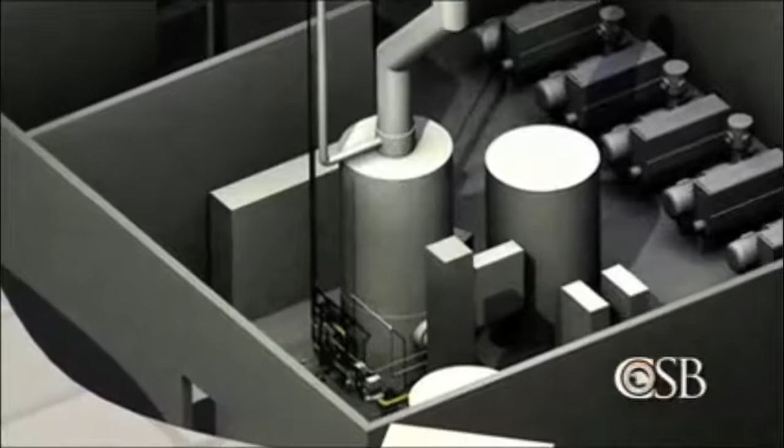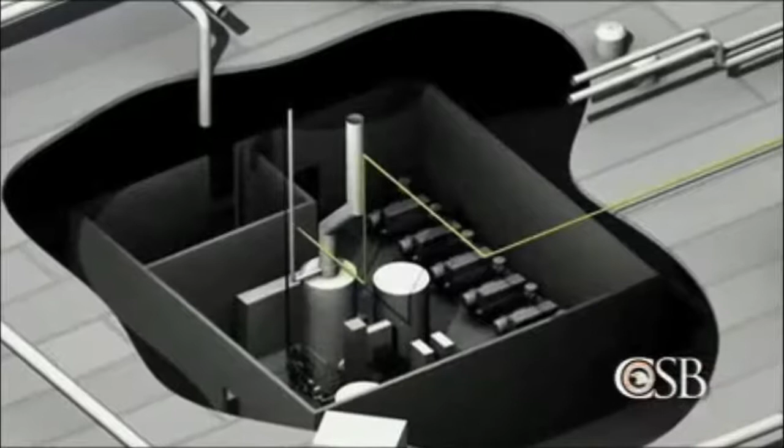Several days prior to the accident, a new steel gas pipe was connected to a natural gas supply pipe located on the roof of the plant. The newly installed gas pipe ran over 120 feet along the roof and then down into a utility room where the new water heater was located. The new gas piping was pressure tested with air to check for leaks, along with the existing supply pipe.

No leaks were found. ConAgra employees then used natural gas to purge or remove air from the supply pipe prior to use. Attaching a temporary hose to the supply pipe, ConAgra workers vented the flammable gas directly outdoors. However, they did not purge the air from the new steel pipe leading to the water heater. On the day of the accident, an ESA worker was attempting to remove air from this new piping prior to lighting the heater. But ConAgra did not always require piping to be purged outdoors.

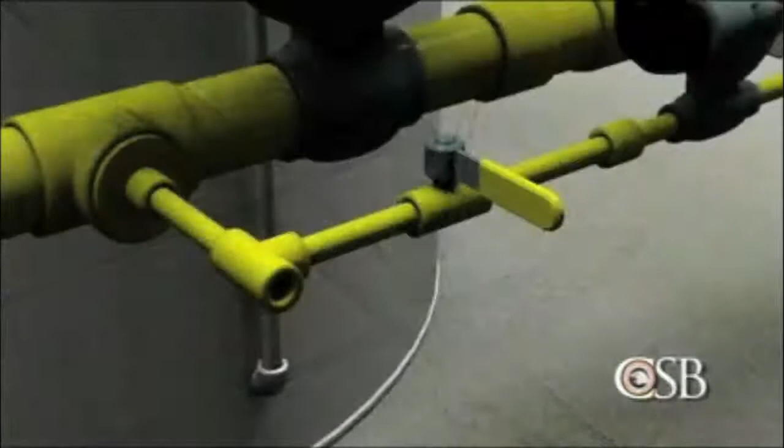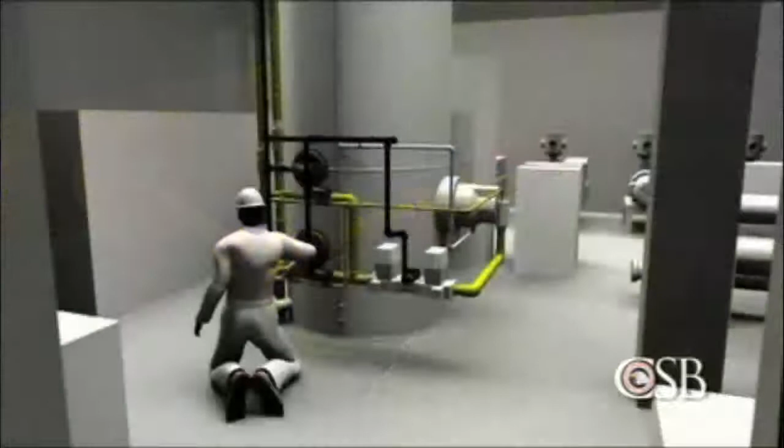The gas supply valve on the roof was opened. Then the ESA worker opened a valve near the water heater, allowing gases to escape through an opening in the pipe. However, he was unable to light the heater and evidently concluded that this was caused by air remaining in the pipe. So he continued venting the pipe intermittently into the utility room over 2.5 hours. But the air had left the pipe and invisible natural gas began entering the room.

No one used combustible gas detectors to monitor the atmosphere. Instead, workers used an unreliable practice. They trusted their sense of smell to warn them of the presence of natural gas. They were unaware that the gas had built up to a dangerous level inside the building. Shortly before 11:30 a.m., the natural gas found one of several potential ignition sources, perhaps an electrical device, and ignited,

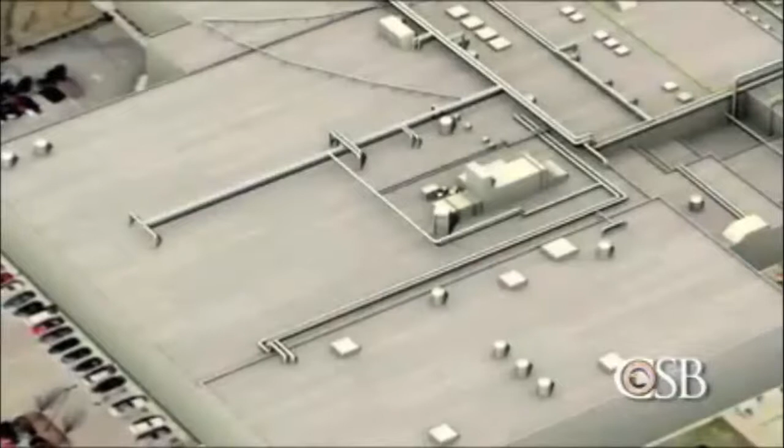causing a catastrophic explosion. The building construction included prefabricated concrete roofing slabs known as double T's, weighing about 12 tons each. Many of these double T's came crashing down to the floor more than 20 feet below, injuring and trapping workers.

Natural gas often has an odor added to it, a mercaptan, and this odor is put there so that people can recognize when natural gas is present. However, people don't realize that they can become desensitized to odor. The CSB also noted that new gas pipes and containers can remove the odorant from natural gas, an effect known as odor fade. One of the lessons we've learned from ConAgra in these similar

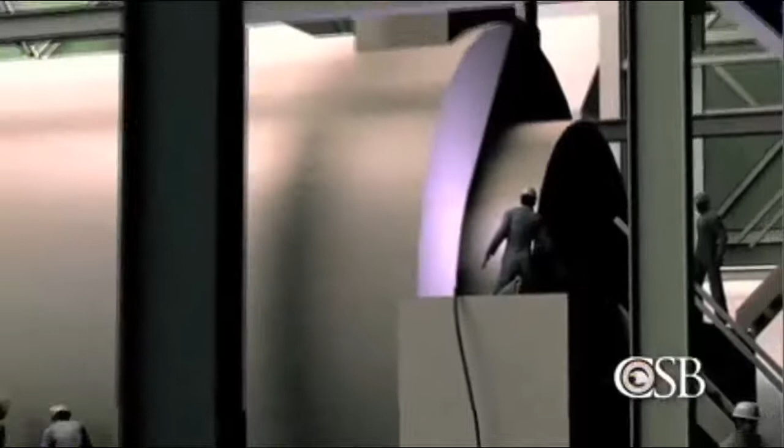are difficult to completely eliminate. In addition, metal debris expelled from piping can strike other objects, causing sparks that can ignite the gas. More than 150 workers were at the plant that day, including over 50 inside the power generation building. Only about 15 of the 50 were actually involved in conducting the gas flows. Beginning at 7:30 a.m., gas and debris were released from a number of open pipes just outside the power generation building. 15 gas flows took place that day over a 4-hour period.

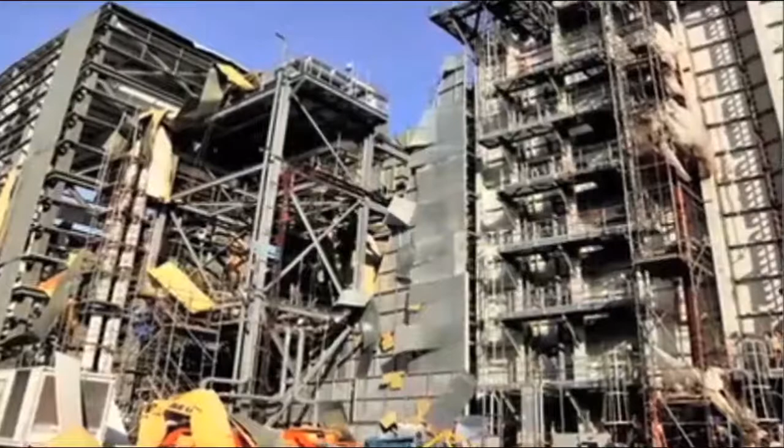Gas company records show that some 2 million standard cubic feet of natural gas were released to the atmosphere that morning, enough to fuel a typical American home every day for more than 25 years. Around 11:15 a.m., gas was blown through an open pipe into a congested outdoor area next to the power generation building. The natural gas accumulated to dangerous levels, contacted an ignition source, and exploded. Six people were killed, and at least 50 were injured. The CSB believes that the use of flammable natural gas in gas.

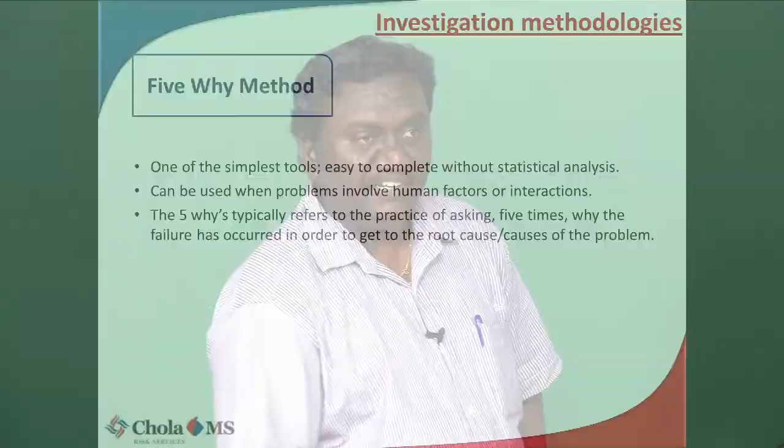Okay, fine. Are you clear with this? Let's do analysis using 5Ms. Start with materials. What went wrong with materials? What is the gas used? So natural gas. What is the property of the natural gas? What was the activity? Why natural gas was vented?

The activity was called purging. To clean the pipeline or clean the equipment, because it's in construction. From the construction they are just going for pre-commissioning or commissioning activities. So during the construction there may be debris which can be present in the pipeline or the equipment. Before they start the plant, that pipeline has to be cleaned. How to clean?

By pressurizing, using the compressed gas or pressurized gas, whatever the content inside can be let out. The idea behind it is cleaning the pipelines as well as the turbine blades in the second case. So what they have done is purging. Fine, it is for cleaning the pipelines. So the material they used is natural gas, right? Is there any option instead of natural gas?

Possibly compressed air, but with compressed air there may be some issues because it has some moisture. If the equipment has to be maintained free from moisture, the option of using compressed air can be ruled out, because generally in air you may find some amount of moisture, or otherwise you have to use dry air. That is one possibility. Is it possible, can you use nitrogen? Nitrogen is possible.

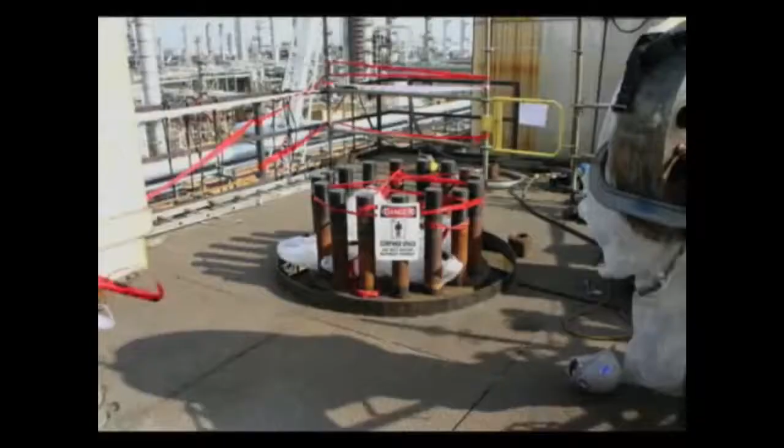Describe a funny feeling where they can take a deep breath and they still feel like they're suffocating. On November 5th, 2005, 2 workers died at Valero Energy Corporation refinery in Delaware City, Delaware. They had entered a reactor vessel, a confined space that was filled with nitrogen, an odorless, invisible gas. The accident occurred during a maintenance operation at the 5,000-acre facility, which processes 180,000 barrels of crude oil per day.

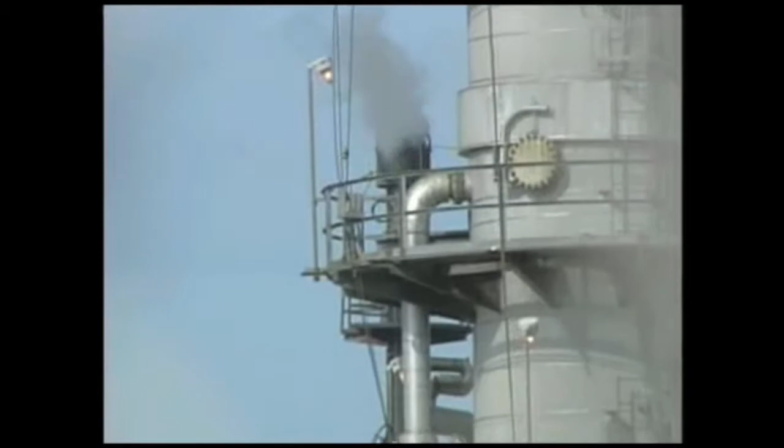The complex is one of Valero's 18 U.S. refineries and has 570 employees. The U.S. Chemical Safety Board investigated the accident and issued a case study with safety recommendations. This is not a new issue for the CSB. In fact, the board conducted an earlier investigation into the hazards of nitrogen asphyxiation and issued a safety bulletin in 2003. It identified 85 nitrogen asphyxiation incidents that occurred between 1992 and 2002, killing 80 people and injuring 50.

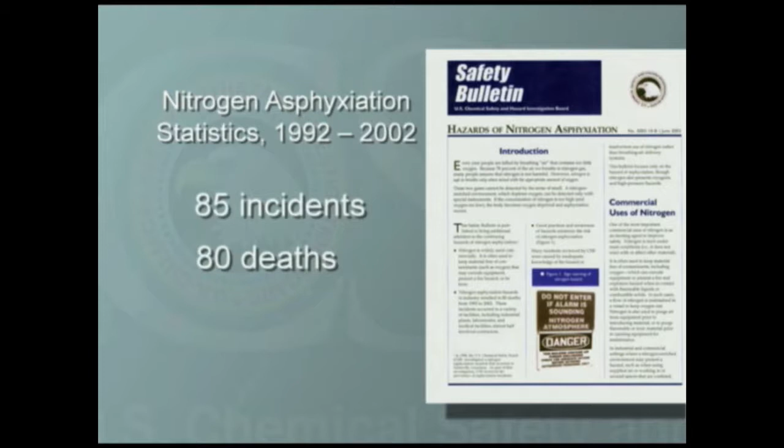That study and incidents since its publication in 2003 show that lives continue to be lost because workers are not being made aware of the dangers of oxygen deprivation. Oxygen comprises 21% of the air we breathe, and humans cannot survive for long when it drops below about 19%. In refineries and chemical plants, dangerous, low-oxygen environments are created when inert gases like nitrogen are used to remove oxygen from pipes and equipment. The risk of an oxygen-deprived atmosphere is that you will get trapped in that situation, get trapped and die.

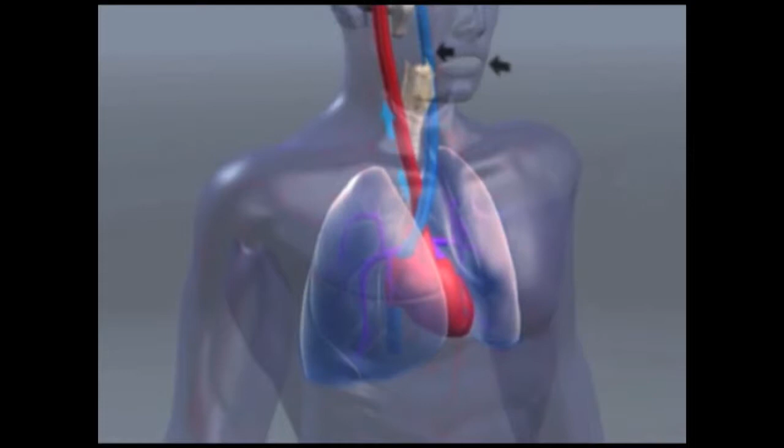Dr. Tee Guidotti is a physician and chairs the Department of Environmental and Occupational Health at George Washington University. He describes the effects of oxygen deprivation on workers. The moment a person first goes into an oxygen-deprived atmosphere, they are effectively in a vacuum. And when the oxygen-deprived atmosphere begins to enter the lungs, the oxygen in the blood, and so the brain, starts to fall. That affects the brain's judgment, it affects the breathing, it affects the ability to exert strength. They fall down, fall unconscious, or their judgment is so impaired that they can't find their way back out, and they die.

The CSB case study on the Valero accident underscores the importance of strict safeguards when working around low oxygen environments. Workers are in danger not only inside confined spaces, but also around openings where inert gases like nitrogen are flowing out. Here's what we believe happened the night of the accident.

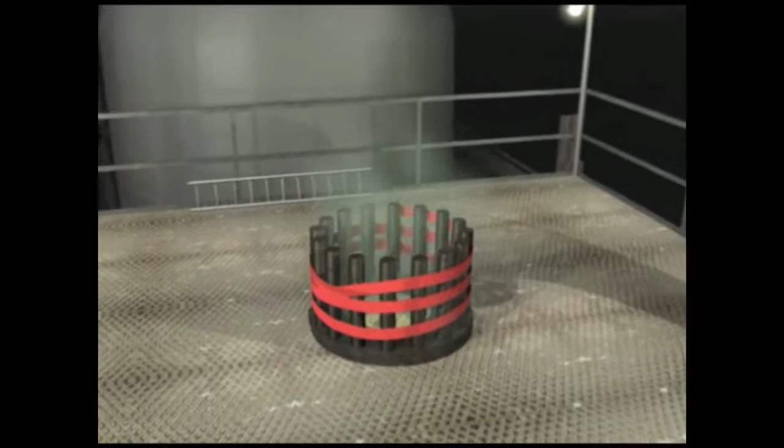Valero's hydrocracker reactor number R1 was shut down for maintenance. A large pipe elbow had been removed, creating an opening surrounded by large steel poles in the middle of the platform. Workers had wrapped red tape around the poles and covered the opening with plywood and plastic. Nitrogen flowed into the reactor and exited from the covered opening. Nitrogen is invisible, but it is colored light green here for illustration.

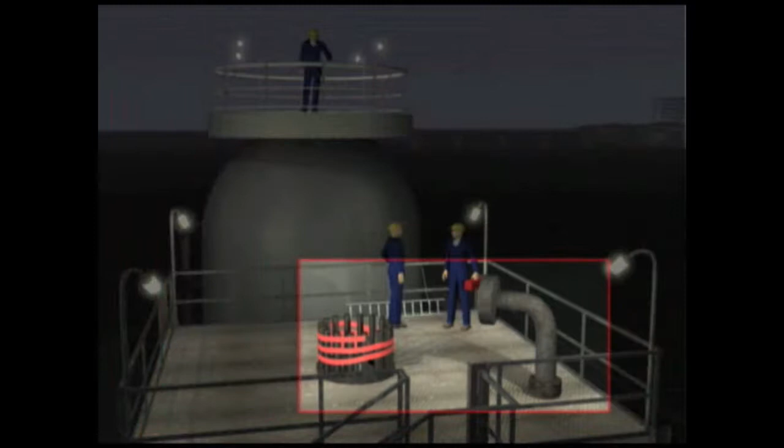Workers had attached a sign reading, "Danger, confined space, do not enter without permit." However, there were no specific warnings posted about the nitrogen hazard. A crew of Matrix contract workers had received a Valero-issued permit to reinstall the pipe elbow. The safe work permit did not warn the crew that the reactor was filled with nitrogen. In fact, the permit stated, quote, "Nitrogen purge NA, not applicable."

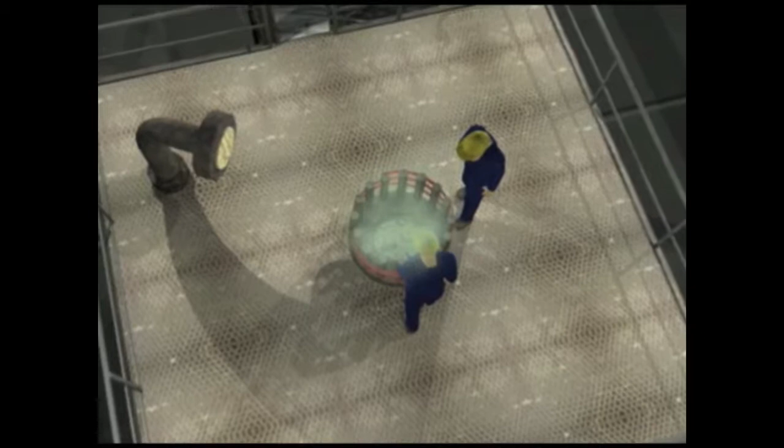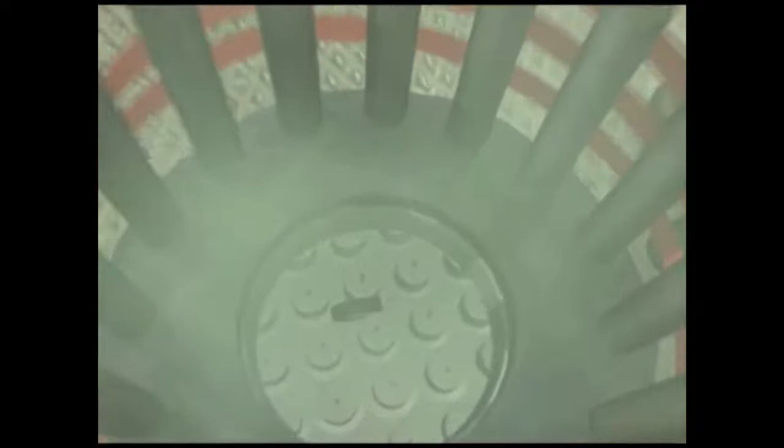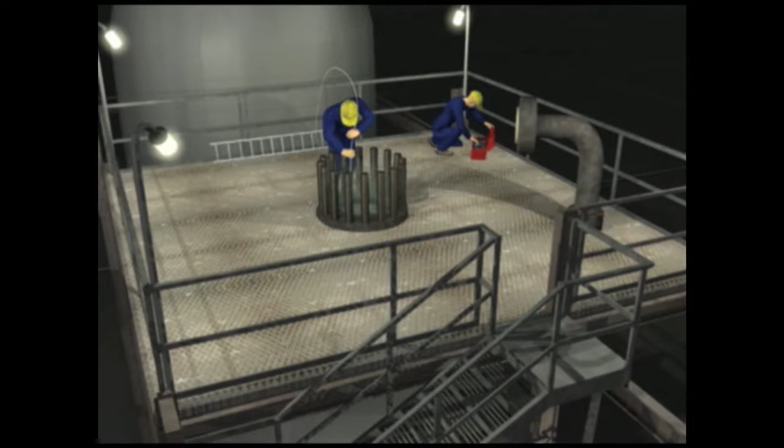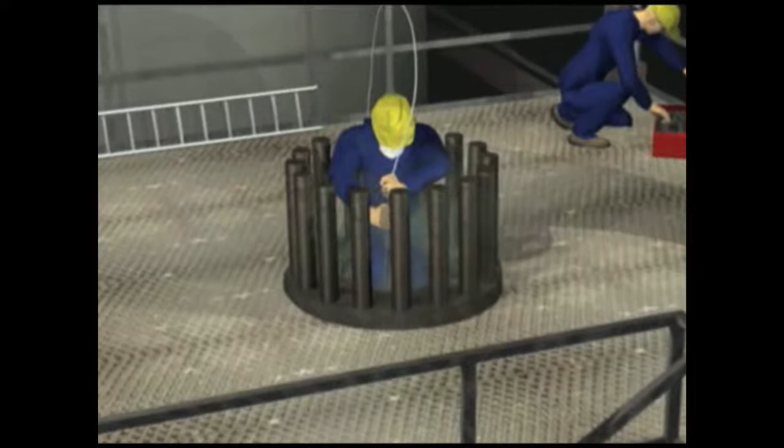Two contract workers removed the plywood cover and cleaned the ledge around the opening. At about that time, a third worker noticed a roll of duct tape lying 5 feet down inside the reactor. He then got closer by sitting on the ledge of the opening with his legs dangling inside, but he still could not remove the tape. Based on the evidence, the CSB developed two possible scenarios for what happened next.

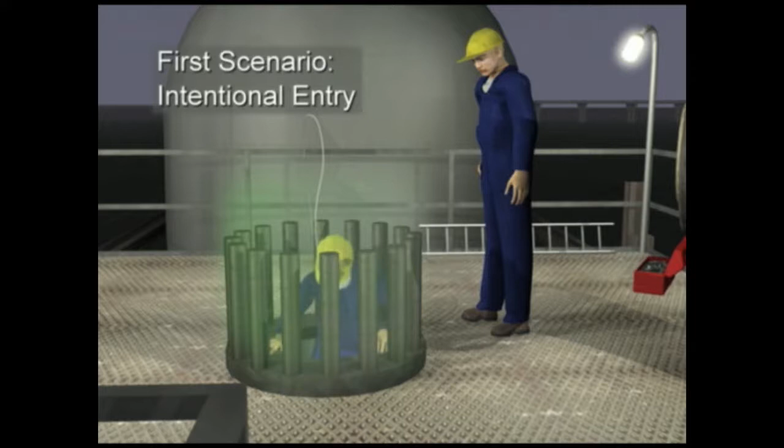In the first scenario, the worker lowered himself into the reactor to quickly grab the tape, relying on his foreman nearby to insert a ladder so he could climb back out. But after lowering himself into the reactor, he inhaled the nearly pure nitrogen inside. Deprived of oxygen, he quickly collapsed.

In the second scenario, the worker on the ledge leaned over the opening, trying to get closer to the tape. At that point, he either accidentally slipped into the reactor, or he breathed in the oxygen-deficient atmosphere just above the opening, lost consciousness, and slid in. What happened next added to the tragedy. An eyewitness saw the foreman and the contract administrator peering into the reactor. The stricken worker was lying unconscious inside.

The foreman quickly inserted the ladder into the reactor and climbed down to help his fellow worker. But without a breathing apparatus, he too collapsed from the lack of oxygen. The contract administrator declared an emergency on his radio. Valero operators then sounded the unit alarm. When company emergency responders arrived a short time later, they saw both victims lying motionless inside the reactor. A handheld meter inserted through the opening showed less than 1% oxygen, a lethal atmosphere.

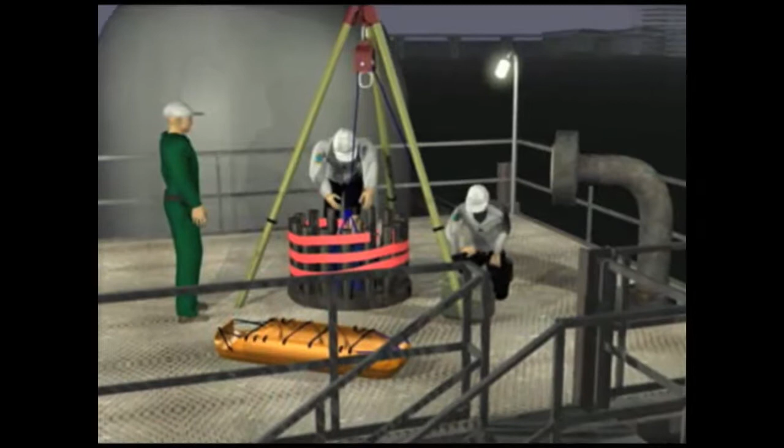Wearing supplied air breathing equipment, the responders entered the reactor. A rescue hoist was used to remove the workers. It was now almost 10 minutes since the first worker had collapsed. Attempts to revive the men were unsuccessful, and both were later pronounced dead in the hospital. The CSB believes that two workers died within a few minutes of entering the nitrogen-filled reactor. This tragic accident was avoidable. The CSB determined

Okay, well, for this particular accident, which will be the most suitable method to analyze? Which one will you select? We have seen different models, right? Different methods to investigate: fault tree, then 5M, then 5 Whys. Which will be the most convenient, suitable method to investigate this particular accident? If you are an investigator, which methodology will you adopt to investigate this accident?

You can apply any tools, agreed. Okay, if you are there as an investigator, which will be the most convenient method to investigate this particular accident? 5M? Okay. 5 Whys also? Good. Okay, let's try with both, not a problem. Okay, majority will go with 5M. We will start with 5M. Start with man. What went wrong with the man?

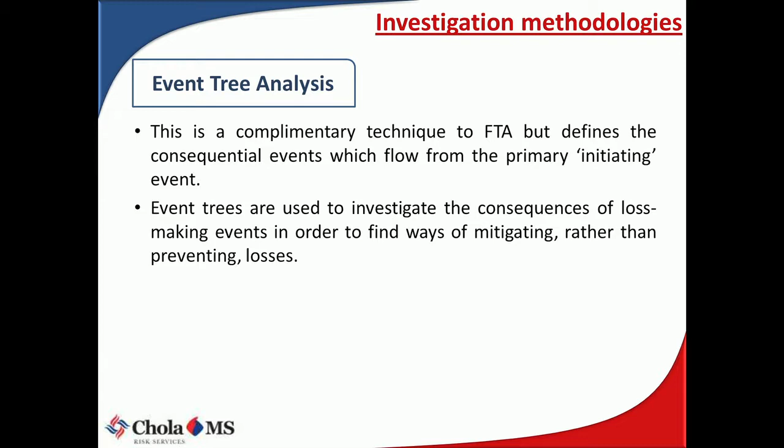Okay, this is event tree analysis. This is a complementary technique to FTA, but it defines the consequential events which flow from the primary initiating event. Fault tree analysis is a reverse thinking technique, in the sense that from the event, or from the fifth domino, we go back, whereas event tree is forward thinking. If there is a valve failure, assume that there is a near miss. In this case it was a near miss, but if you are keen on investigating a near miss, you can understand to what extent this near miss can result in, and you can establish that using an event tree.

So, event trees are used to investigate the consequence of loss-making events in order to find ways of mitigating rather than preventing losses. It is again a proactive, forward thinking method. You can always use an event tree to investigate your near misses. So, as we say with Frank Bird or Heinrich, for every 300 near misses there would be 29 minor incidents and one major. This is Heinrich.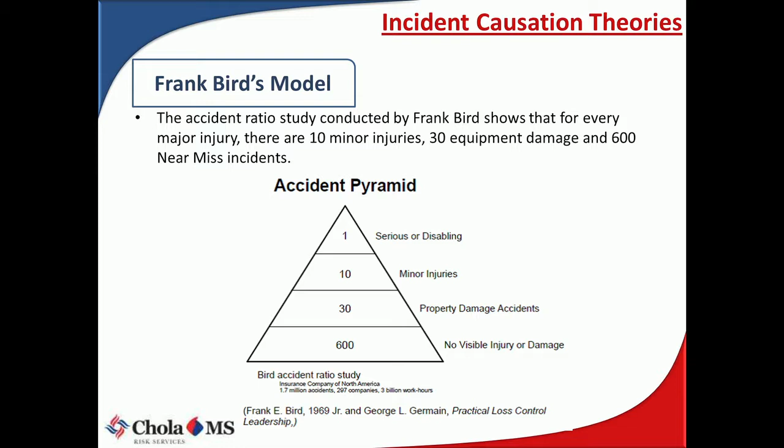When you talk about Frank Bird, it is 600, then how much? 600, 30, 10, then 1. So, 600 are near misses. Using the event tree, you can trace the path and apply some control measures so that the major, serious or disabling injury or incident can be prevented. So, event tree is generally a proactive method which can also be useful for an investigator.

How to go about the event tree? Identify the primary event of concern, take a near miss. Identify the controls that are assigned to deal with the primary event, such as automatic safety systems, alarms and operator actions. What are the control measures which are supposed to be there? Just assume. Construct the event tree beginning with the initiating event and proceeding through failures of the safety functions. Establish the resulting accident sequences. Probably it will end up in an explosion or a fire or some sort of loss. So, identify the critical failures that need to be addressed, where you can impose some actions so that the final event can be prevented.

So, all these methodologies we use are mainly to identify the root causes or the basic causes. The purpose of identifying the basic causes is to look into them and suggest some control measures or recommendations. So, when you develop an effective recommendation, you need to be very specific. Do not give generalized recommendations. The most important final step is to come up with a set of well considered recommendations designed to prevent recurrence of similar accidents. Once you are knowledgeable about the work process involved and the overall situation in your organization, it should not be too difficult to come up with realistic recommendations.

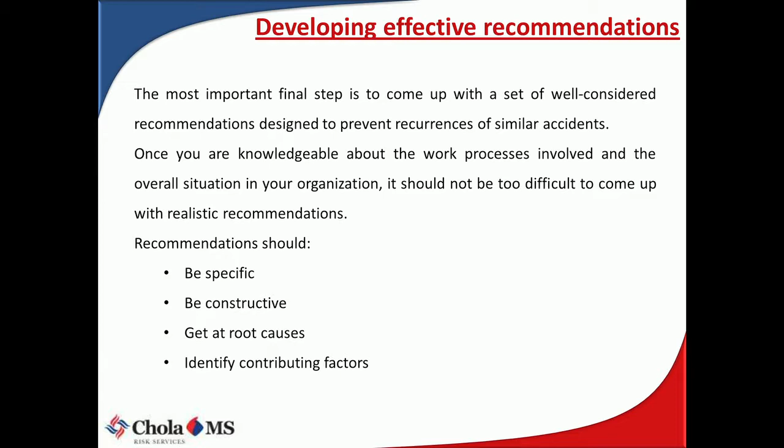Recommendations should be specific, constructive, get at the root cause, and identify contributing factors. Generally, recommendations should go as corrections, corrective actions and preventive actions. Corrections are something you do immediately to bring the situation back. Corrective actions are something you implement to avoid an accident. Preventive actions are ahead thinking, so that similar things wherever possible in your areas are prevented. So, your recommendations are generally given in these three categories: corrections, corrective actions and preventive actions.

So, that is it. Any questions? Any questions?

So in the last two days we started with the accident causation model, to summarize. We started with the domino effect using Heinrich's model, and looked into different theories: epidemiology theories, systematic theories, and multiple causation theories. Then finally we ended up with Frank Bird's model, which gave a different dimension from Heinrich, in the sense that for the fifth domino, instead of injury, he changed the word injury into loss. So in addition to that, lack of control, management control, was also demonstrated in Frank Bird's theory.

After that we started with different case studies using different methods we could use. So that is it. Any questions?

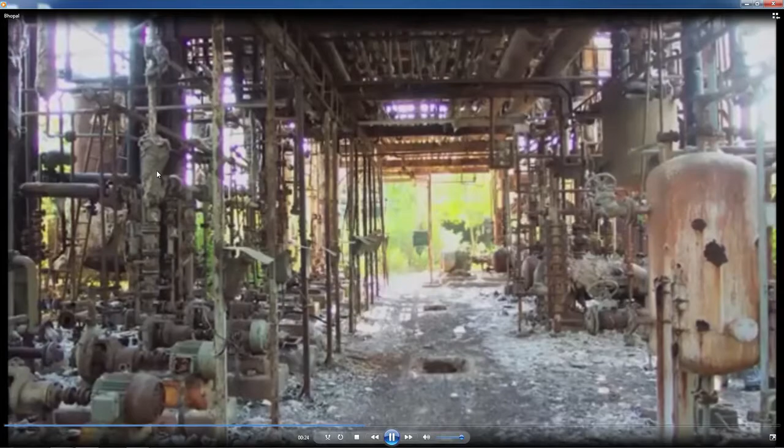The accident which I am going to show is generally familiar - you people are aware of the Bhopal gas tragedy, one of the worst disasters in the history of industrialization, which happened in 1984.

Okay, you've seen the results of that. So here is a schematic diagram of what went wrong. There were three tanks, the horizontal tanks, numbered E610, E611, and E619, where the methyl isocyanate was stored. The case is that accidentally water entered tank number 610, which at the time of the accident had 40 tons of methyl isocyanate stored inside. Because of the water entry, there was a rapid reaction and gas was released, which resulted in the devastation.

Okay, yesterday we saw two theories, right? The first one we saw is the model of Heinrich. The second one, developed by Frank Bird in 1969. Using that model, for each domino we will identify the situations.

What is the fifth one in Frank Bird? Try and find losses, total losses. When it's Heinrich, he told that the fifth domino is injury, but in 1969 a new dimension was given - not only does an accident result in injury, it can be a loss, it can be property damage, material damage, downtime, or anything. So Frank Bird's theory remains, and the process safety movement got activated after Frank Bird's.

In addition to that, as a passive protection, there is a water curtain. What is the purpose of the water curtain? If the gas is released, it should not be dispersed. If there is water, what will happen? It can be contained. In addition, methyl isocyanate with water may not be that toxic, it can be contained. That is the reason for the water curtain, which also was not high enough to contain all the gases released from the vent gas scrubber.

So all these reasons, all these complex factors led to an accident. Could you get my point? So in this way we need to come back, take the dominoes, starting from the fifth domino, which is the result, generally a loss. The loss we consider is a fatality, then it is an accident, release of methyl isocyanate to the atmosphere, then we try to identify facts and conditions, then basic causes, then it comes to lack of control. Could you correlate how to apply the same theory in a proactive sense to identify the root causes for the incident? Clear?

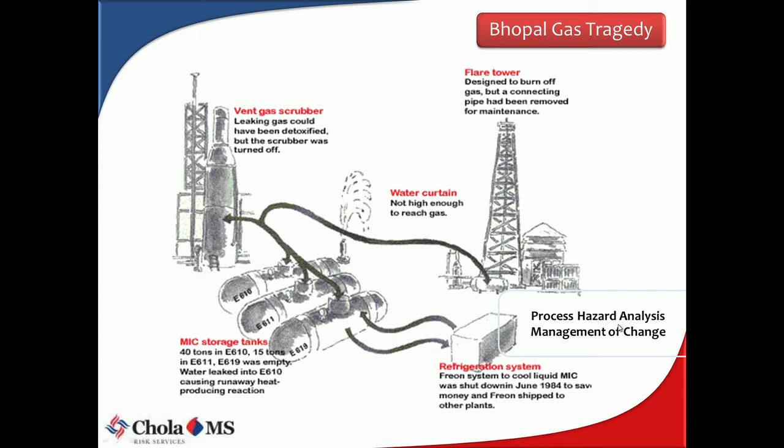Okay. Refrigeration system was not working. What is the PSM element missing here? There was no process hazard analysis and management of change, correct? There was no work permit system or training, no process hazard analysis, because the vent gas scrubber was not in line.

But what will be the effect? Nobody has studied, nobody has critically examined to understand the risk. There was no operating procedure. If there is no scrubber in line, there should not be operation, so that is not listed here. Then there is no flare, the pipe connected with the flare was disconnected, mechanical integrity was not ensured, correct? So flare is basically to burn the chemical.

Flare is something like a chimney. So when the gas is let out, it will basically be burnt out. The toxic gas which goes through the flare will be burnt out and only smoke or whatever will go out, meaning the toxic effects will be suppressed there. In the oil and gas industry also there is a flare — excess oil or gas which will not be let out raw is burnt, and only the smoke goes out. That is the purpose of flare. So even with flare, it is designed to burn off excess gas, that is the purpose of flare.

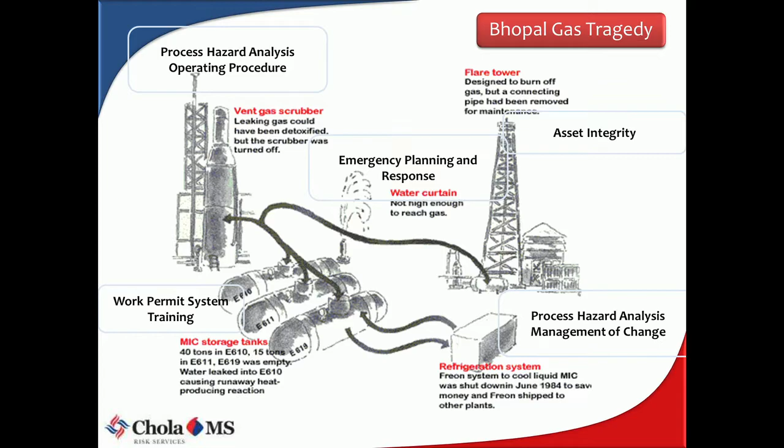Emergency planning and response is part of the curtain which is also not active or not in line. So all these different factors result in a major disaster. As we said yesterday, for every accident there won't be a single cause, it is multiple causes which are generally interactive, leading to an accident.

This is one of the techniques used for investigating an accident, generally called fault tree analysis. You would have seen it applied in different places. Here we take fault tree analysis for investigating an accident.

A structured team analysis of the possible underlying causes of a known equipment failure. Take an equipment failure, it is a reverse thinking technique. We start with the end result or end event, and from there we try to develop a tree, going back until we reach the basic cause, meaning where you cannot further develop the tree, we stop there. So all the unconcluded basic causes can be the result of an incident. We try to correlate or set points so that we can identify all the root causes in it.

Why is root cause analysis of failure needed? For a better understanding of the root causes of a failure, and a better set of action plans to eliminate those root causes. When you bring down the root causes to the point where you cannot further develop them, we generally call these basic causes or root causes. For each root cause you find a solution, so that if the solutions are implemented, you can prevent an accident.

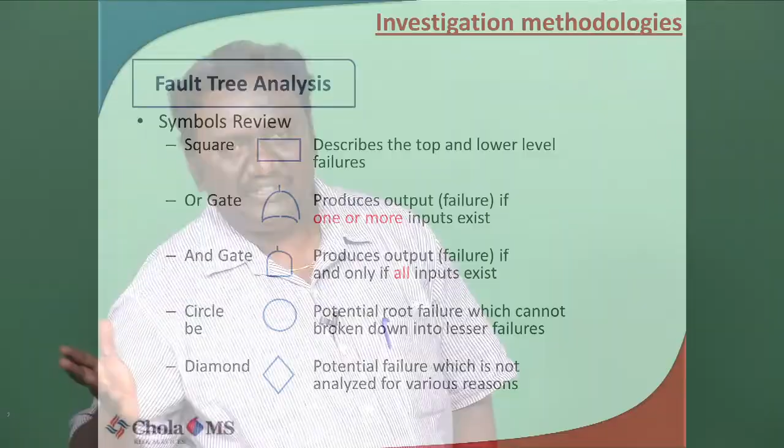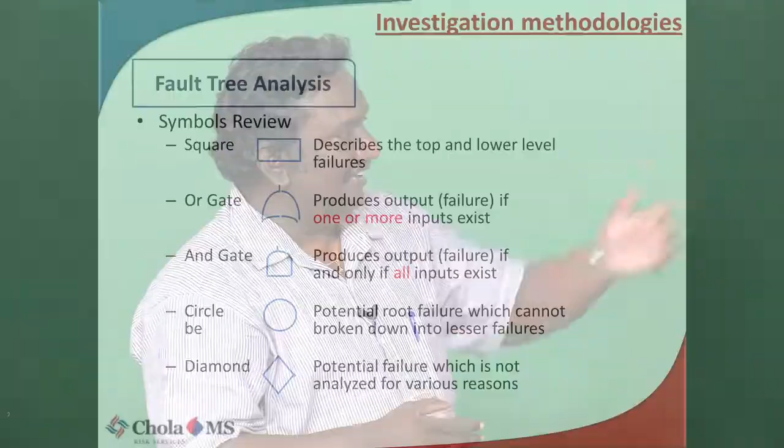These are the symbols generally used in the fault tree. The first symbol, a square, describes a failure or an event - it can be a top event or an intermediate event, shown as a square or small rectangle. An OR gate represents an either-or situation: there may be two or three causes, and not necessarily together, but either one will result in an event. An AND gate is a combination of two or three causes - when all of them happen together, it results in an event. A circle represents a basic event which cannot be further extended. A diamond represents a potential failure which is not analyzed for various reasons - this is the decision making gate.

So how do we go about fault tree analysis? First, identify a top failure. Take the example of the Bhopal gas tragedy which we discussed - what is the top event? Fatality, death of people - that will be the top event.

Then brainstorm basic contributors to the failure. From there you derive a tree using different gates - it can be an AND gate or OR gate. Whenever you choose an OR gate, the causes are independent, but when you take an AND gate, it is a combination of two or three causes. So you link contributors to the top failure, deriving a tree to determine which combination of contributors is needed to cause it. It is basically a brainstorming session with the people, using logic gates to develop trees until you derive the basic causes.

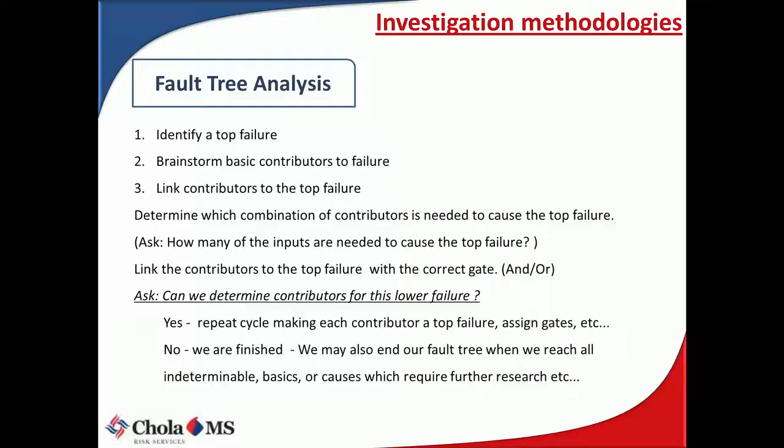Grinding can be done by a bench grinder or an angle grinder. What is the difference between them? There is a bench grinder, which is fixed to a table, where the wheel revolves while you hold the tool to grind it. So in a bench grinder, an operator controls the tool or workpiece - there are two things, the grinding wheel rotating, and the operator holding the job. Take for example a knife that you want to sharpen.

The operator holds the knife against the rotation of the wheel. Here the operator is controlling the job, not the wheel. The wheel just starts rotating when you switch it on, and stops when you switch off. The operator only controls the job. In the case of an angle grinder, the operator holds the grinding machine in his hand, and the job is generally fixed.

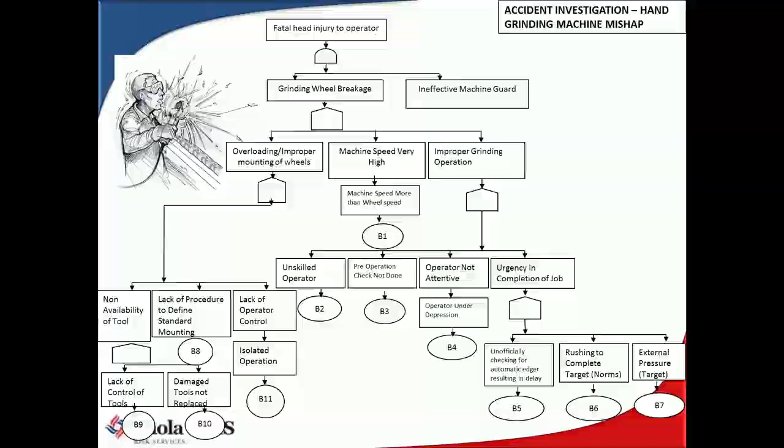If you have not chosen the right machine, say the wheel is designed for 6000 RPM whereas the machine was rotating at 9000 RPM, the wheel will also tend to rotate at 9000 RPM. So naturally the wheel can break at that point. So one cause can be machine speed very high. The second one is overloading, what we discussed, how the wheel was mounted in the machine. It can be over-tightened or it can be loose. For both reasons it can fail.

The next one is improper grinding operation. Probably the operator forcibly applied the wheel over the job. That is also a cause. If you apply more pressure, more force, the wheel tends to fail. So all these things are possible, but not together. Any one event can result in the successive event, the breakage of the wheel, correct? Could you follow me? Then we go to overloading or mounting of wheels.

What would be the reason? Non-availability of the tool. Probably he may not have the right spanner, so he has not tightened properly, or probably he has to use a torque wrench. What is the advantage of using a torque wrench? You know how much you are tightening. When you tighten with a spanner, you tighten by assumption, but when you apply a torque wrench, you know what torque you need to set for the particular bolts. So, non-availability of the tools.

Then lack of procedure to define the standard mounting, how to fix the wheel. So, probably there may be lack of procedures. Lack of operator control means that the operator was not supervised. So, any one of the reasons can lead to overloading of wheels. Then machine speed very high, machine speed more than the wheel speed. Possible? That is possible. So, that is a direct basic cause.

Further, the tree was not developed. Could you get it now? Because if the machine speed was more, nothing can be done. So, that is a direct root cause. So, that is concluded as B1, a basic cause. The round one is a basic cause. You cannot develop it further. That cause itself can result in an accident.

Then goes to improper grinding operation. Why? Unskilled operator. Whether the grinder has sufficient competency, skills, training, that would be the reason. Poor operations, pre-operation checks not done. Probably the wheel would have been broken before itself. He has to check the wheel before he mounts. Probably it was not done.

Operator not attentive, maybe due to some psychological issues or some problems. Urgency in completion of the job. Probably the operator was in some urgency, he wanted to complete the job well in time. So, all these things can lead to improper grinding operation. Okay. Here the lack of procedure also comes directly as a basic cause.

Then non-availability of the tool. The reason behind it is lack of control of tools or damaged tools. So, probably the operator may not have the right tools. The supervisor did not give the right tool to the operator, that may be one of the causes. Or the second one is damaged tool, so he has taken some tools as a jugaad for working on it. So, all these things can be causes. You understand how its cause is to be derived?

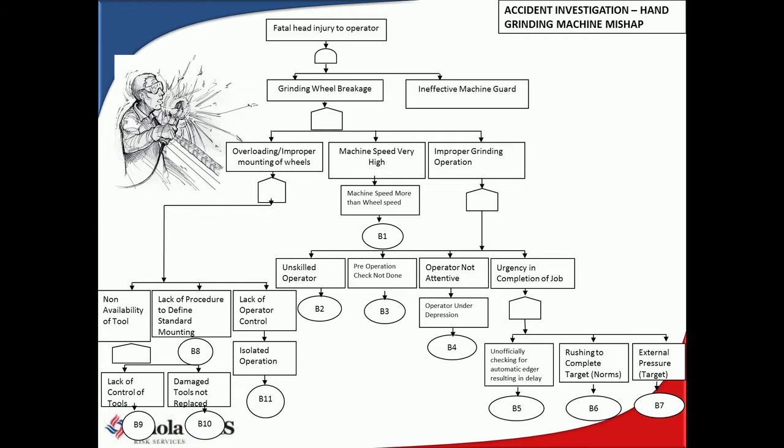Any questions? Okay. We establish a tree, we develop a tree till you reach the basic cause. So, whatever comes in the round B1, B2, B3, B4, B5, all these things are what? Basic cause or root cause. So, you need to focus on how to prevent these basic causes. For each basic cause, you need to provide suggestions or recommendations. If these recommendations are addressed or implemented, then these accidents can be prevented. You understand how to go about it?

There are different ways to perform an investigation, generally by checklist, by interrogating the witness, by taking a statement, by physically checking the working place, verifying the documents, you can conclude. Certain things, if you are not in a position to conclude, you can take some methodologies. One of the investigation methodologies can be fault tree. So, the way you have to proceed is this. Any doubts? Shall I move on?

This is the next method, 5M methods. Yesterday we discussed it. What are the 5Ms? Man, machine, material, method, management or mother nature. It is an environment factor you can also consider. The 5M methods comprise man, machine, material, method and management. These are 5 core areas in which factors of accidents and incidents may appear.

When you consider man, it refers to human elements inclusive of psychological, physiological, proficiency aspects, skill aspects as well as qualification for performing the task. Okay, personal factors. We all talk about basic causes. In basic causes there are 2 things, one is personal factor, the second one is job factor. Here with man we address the basic cause of personal factor. Then machine, job factor, refers to equipment such as machinery, computers, tools, instruments.

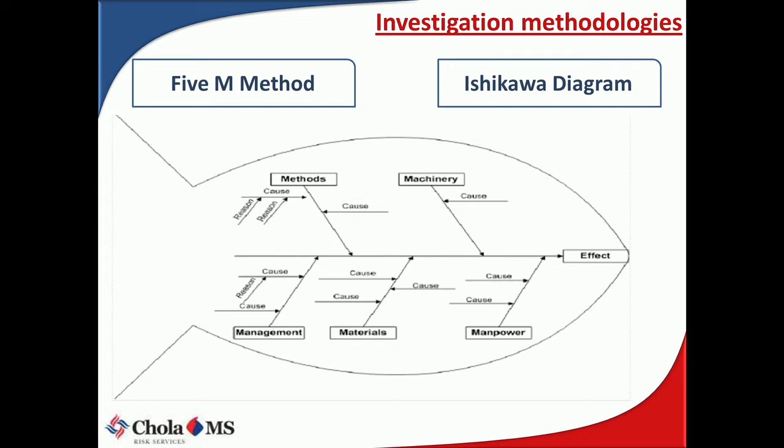Material refers to defective material or incompatible material properties. Methods refer to the rules, regulations, laws, standards or procedures that are supposed to be followed. Management refers to the supervisory capacity of management in terms of regulations, policy, attitudes towards safety. So, generally in the 5M methods, the Ishikawa diagram, we try to put questions and causes, identify them in relation to the 5Ms, and conclude the basic cause from that.

Okay. In industries or workshops, to transfer material from one place to other, generally there will be a crane. The crane will be moving in the rails which are at the top. There will be two rails, in between that there is a trolley fixed. So you are able to achieve long traverse, meaning the crane moves from one end of the building to the other end of the building, along the wall. In the sense, it moves on the rail.

Horizontally also you can move the trolley, because you may have equipment in different places, so it has to move horizontally as well as longitudinally. So there will be a hoist at the top, like a pulley block, which is used to hoist from top to bottom and bottom to top to pick up.

Here the crane movement is generally controlled by a pendant switch operated by the operator from the ground. EOT cranes can be operated in two ways: using the pendant switch, kept by the operator on the ground, or sometimes the operator sits at the top of the EOT crane. There will be a cabin and he can operate. Sorry. For small cranes, generally the operator uses the pendant switch to move.

An operator was shifting an empty tank from the welding area to the dispatching area by using the EOT crane. The EOT crane could not be stopped during its travel due to the failure of the pendant switch buttons. If you see the pendant switch, there are two buttons, one for controlling the long traverse, meaning from this wall to that wall the crane has to move, right? That has to be controlled. So there will be two switches.

In this direction you can take the crane, or in the reverse direction also. Then there is another movement which is to horizontally move the trolley. The next movement will be hoist movement, up and down. The pulley will be there, lifting from the top to the bottom. What happened, the operator lifted the tank. Then he started moving from one end of the wall to the other end of the wall. So in between that there were some cabins.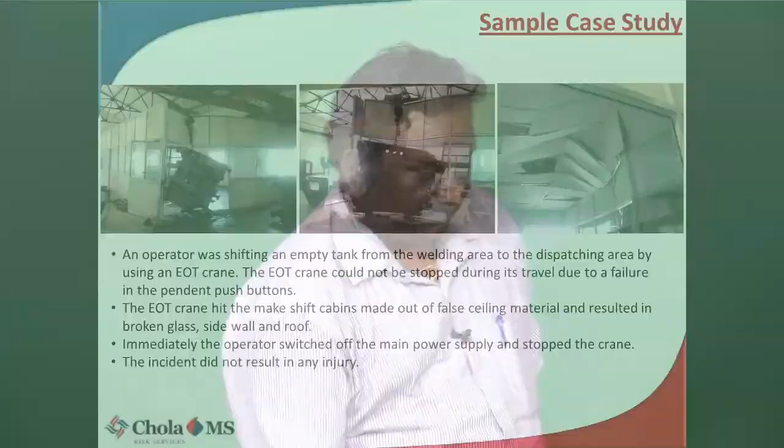You have seen the first photo, right? This photo. You have seen it? This is a long workshop area. In this there is one room which is in the corner of the floor. So what happened, when he was moving the crane, there was some problem with the pendant switch. He was not able to stop it. The movement could not be controlled. So the crane directly went and hit the office area.

It was glass and false roof and all these things. It was the tank which he was moving. So he was not able to control it and hit the office, and it was damaged. Assume that there were some people. Okay. Immediately the operator ran and switched off, not from the pendant switch, from the main switch, and stopped the operation. This was what happened. Shall we work out the 5M method for this? You were able to understand what happened exactly, right?

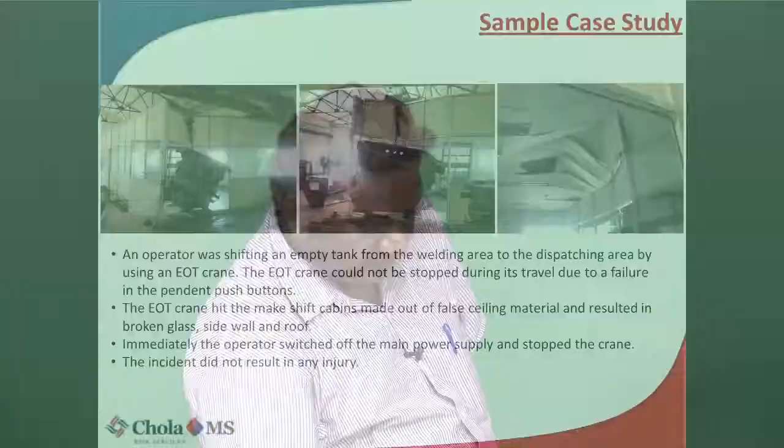Where will we start from? From the machine. What went wrong with the machine? There was no control. Loss of control. The basic cause behind the loss of control is the EOT crane was under maintenance. It was under repair, but a person operated the machine. So that was the straightforward case with the machine. Amidst the repair, the faulty machine was used. That was the major cause.

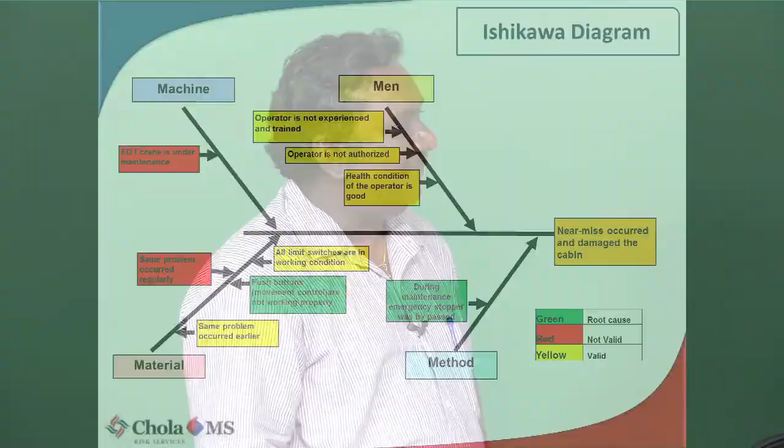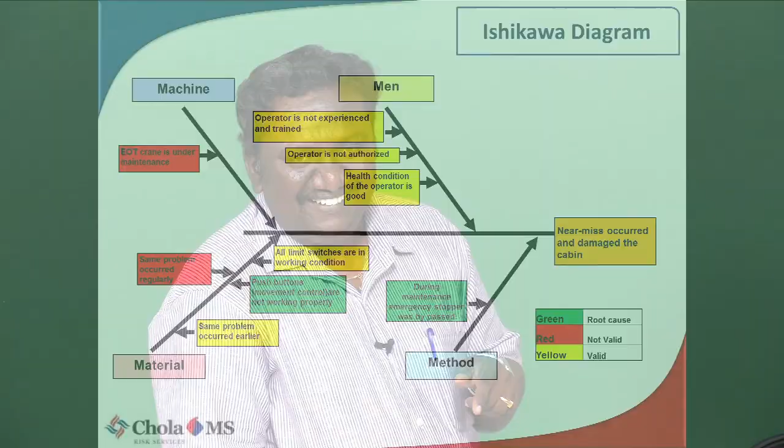Then go to the men. The operator is not experienced and trained. The crane operator who used it was not trained. The operator is not authorized. First of all, he is not trained. Only trained persons should control the cranes. These sorts of activities are critical operations, because he is lifting 5 tons, 6 tons of load from one place to other. There are so many machines below.

When he is moving the load, if the sling is not proper and it falls, it can fall on the machine, it can fall on the people. There may be some 20-50 people working in the area, while the equipment is being handled overhead using the crane. So it needs to be operated by a trained, authorized person. In this case, he was not trained, he was not authorized. The health condition of the operator was generally good. Then comes the material.

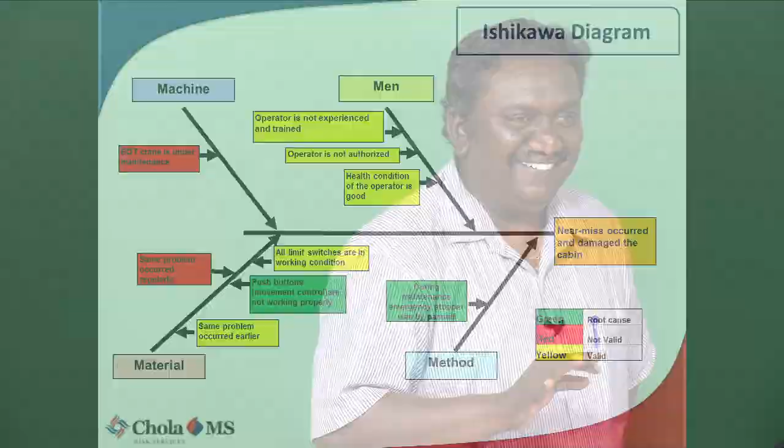Same problem occurred regularly. Failure of controls used to happen regularly. Yesterday we saw one violation. What is that? Routine violation or situational violation. You remember how to correlate with the causation models. So it is a routine thing. That is what they are saying: the same problem occurred regularly.

Next, all limit switches are in working condition. In addition to that, the crane has inbuilt safety features called limit switches. There was a rail I told you about at the top. If the hoist moves and goes and hits the rail, what will happen? It should not go till the end, because if it goes, it can fall. There is a safety feature called a limit switch, meaning that when it goes to the end, it stops 1 meter before the end. In a similar way there is a feature, but the limit switch was working here.

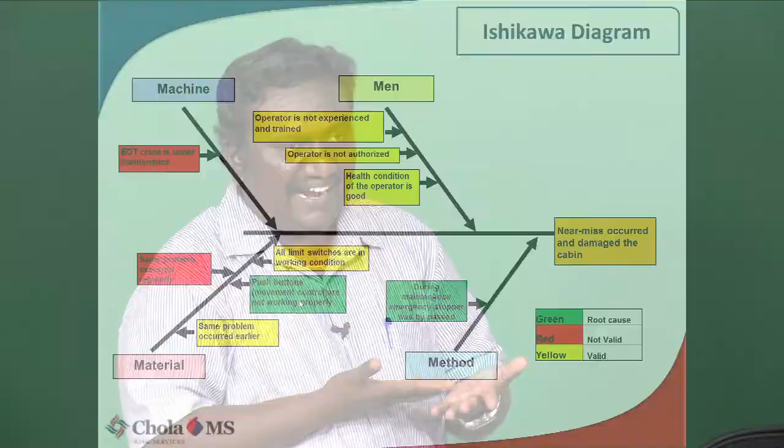Push buttons, movement controls are not properly working. The controls he had in his hand were not properly working. Same problem occurred earlier. Then what is the method issue? During maintenance, the emergency stopper was bypassed, because, as we say, there are limit switches which were bypassed because it is under maintenance. So that is why it was not working. So a near miss occurred and damaged the cabin; that was the cause. You understand how to go about it?

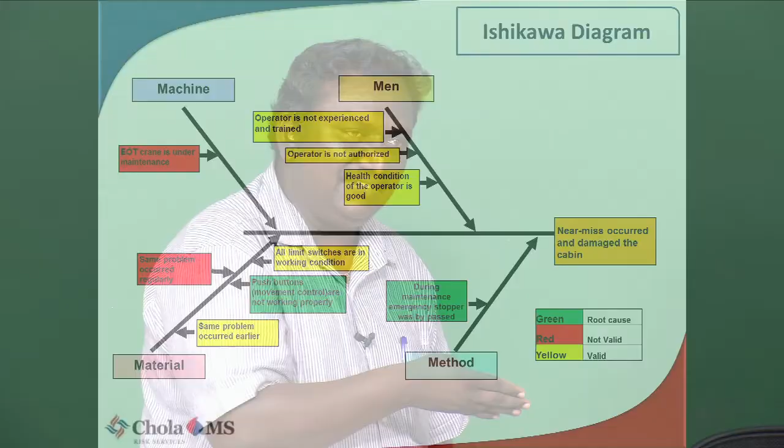Man, method, material, machine. Here one more thing is there: management, because that also has to be taken. Management again comes in: there is no supervision, there is no control over the operator, there is no work permit system, because it is under maintenance. There should be some tag, there should be LOTO, lockout tagout; the control panel should have been locked so that another operator cannot operate it. All these things come under management.

Okay, what are the root causes here? Green are likely causes, yellow are qualifying causes, and red are ruled out. With the availability of evidence, the red things which are highlighted are declared invalid causes. Here it is mainly due to maintenance. During maintenance, the emergency stopper was bypassed, the push button was not working, and all these yellow are qualifying causes.

Clear? Any doubts? You understand how to apply it, because selection of methodology purely depends on the investigating team as well as the severity of the incident. For machines like an EOT crane, small things, these methodologies are very clear. It will be very handy and simple for equipment, machinery, failures. If there are disasters, will you be able to do it with this? It requires a lot of inputs: a lot of statements, a lot of evidence. You need to collect all the evidence from the workplace, from the people, go back to the history, and find a lot of information from the logs. Then only you can conclude.

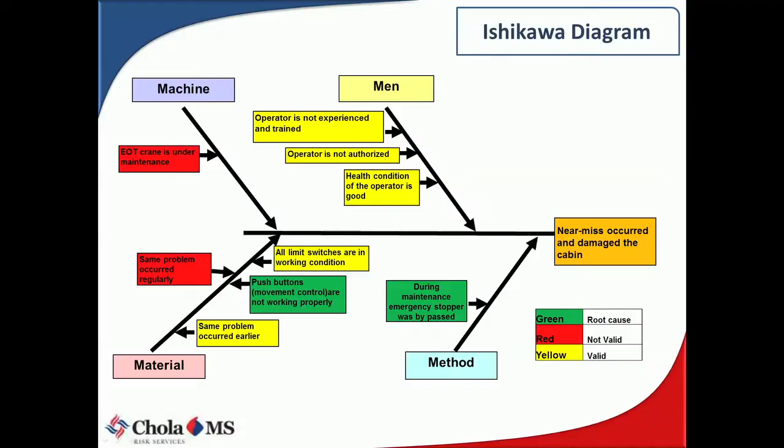Okay, the next methodology is going to be 5 Whys. What is 5 Whys? It is one of the simplest tools. You have to question people and try to get logical answers. Each and every answer you need to further evaluate using why, until you get the basic cause. It is not necessary to ask why exactly 5 times. It can be 7, 8, 10 or whatever. Until you get the basic causes, you need to put the question back. It is easy to complete without statistical analysis and can be used when problems involve human factors or interactions. Whenever a human is involved, this method will be very handy.

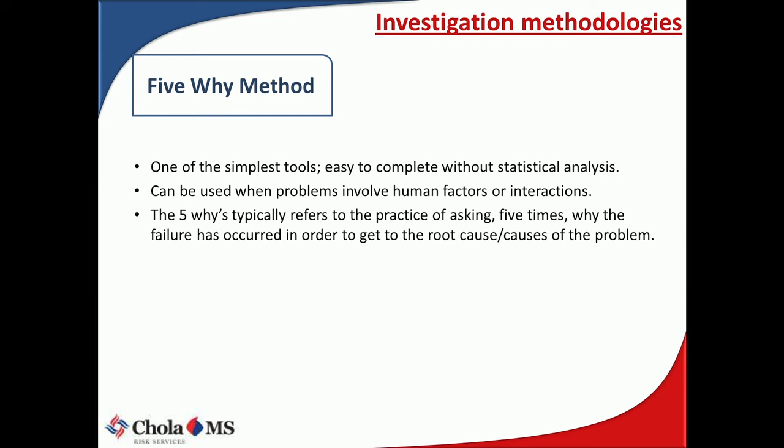The 5 Whys typically refers to the practice of asking why the failure occurred 5 times in order to get the root cause. Why this happened, why there is a fatality, why there is a head injury. The first case which we used, the same thing you can apply here. Why was there a head injury? What will be your answer? Breakage of the wheel. Why was there a breakage of the wheel? Probably the speed was more. Why was the speed more? The operator did not check. So that's the way we can develop logical answers that lead to the basic cause.

Okay. With that I will stop now. In another 5 minutes we will continue with the case history.